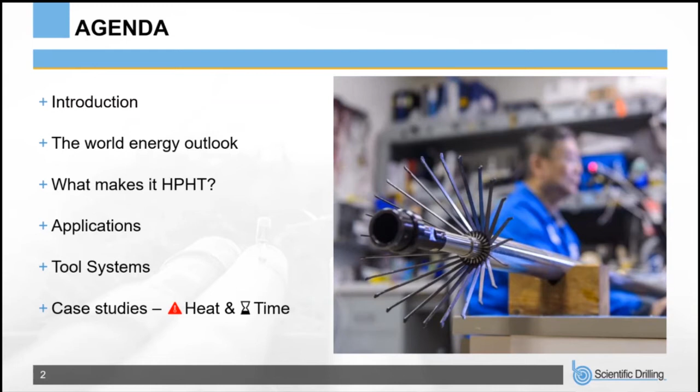Okay, so as for the agenda, we will touch on the importance of high pressure, high temperature hydrocarbons production with the recent growing trend of gas reserves exploration and production. Then we will discuss the tool systems that we are using to address those challenges. Later on, we will go through some case studies where we have overcome the challenges of heat and time. So we are pushing the limits of heat and time, as we will show you in the case studies.

So in this slide, I thought to give you a quick insight into the world energy outlook, as this links directly to the subject of this presentation, high pressure, high temperature challenges. The BP recent energy outlook published in 2019 shows that hydrocarbons will remain the major source of energy, with an observable increase in gas dependence as a primary source of cleaner energy.

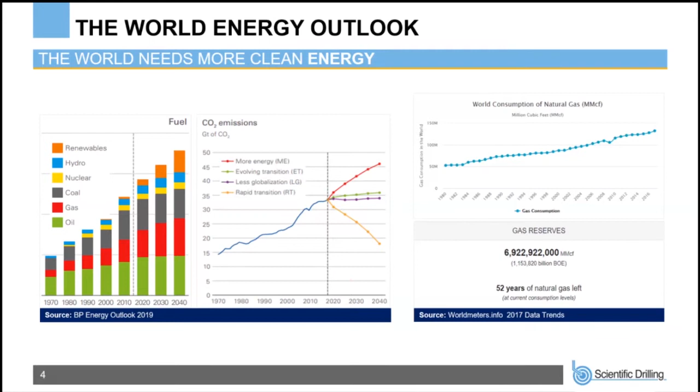The reason for this slide is that most gas wells are exhibiting a high pressure, high temperature downhole environment. So what makes a well classified as high pressure and high temperature? The term itself may be applied to wells that have only high pressure or only high temperature. Actually, few wells have both high pressure and high temperature.

An interesting oil and gas industry study back in 2012 estimated that around 100,000 wells were drilled back then, and only 1.5% of these wells could be classified as high pressure, high temperature. Yes, relatively small in number, but these wells often represent significant resources and require specialized equipment, proper training, and advanced planning to make it a successful intervention.

So a well may be high pressure. If we look at this chart here on the left, the well may be high pressure, most likely due to the pore pressure. The pore pressure means the pressure of the fluids within the pores of the formation rocks. Pore pressure increases with depth because the formation must support the overburden. Pore pressure versus depth can change rapidly due to geologic features in the formation and variable overburden forces, making the pressure in this interval high, and we can classify this well as high pressure.

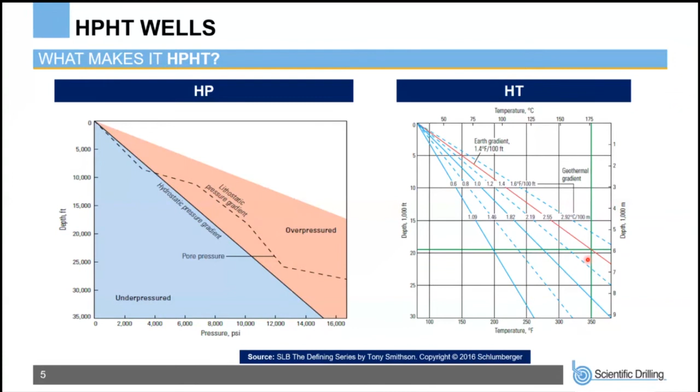Actually, it's not only related to the geothermal gradient; for thermal EOR, where we have steam injection, we have a high temperature downhole environment when we are applying steam injection as well.

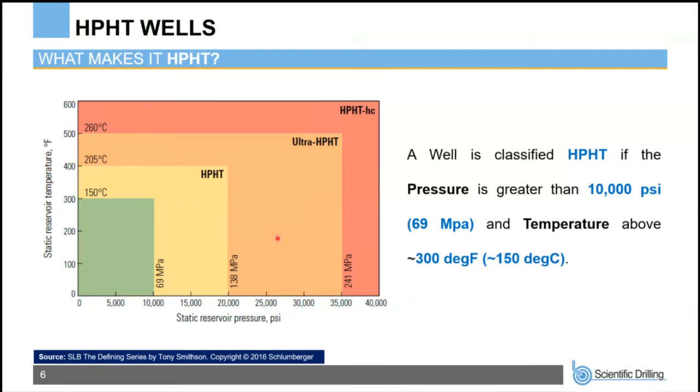So this graphic provides a classification of high pressure, high temperature by the reservoir temperature and pressure. So we can consider a well classified as high pressure, high temperature if the pressure is greater than 10,000 psi and the temperature is greater than 300 degrees F. So this shaded area is representing different well types: oil producer, gas producer, geothermal well, steam injector, ultra deep offshore well. So that differs from each well to another, depends on the type.

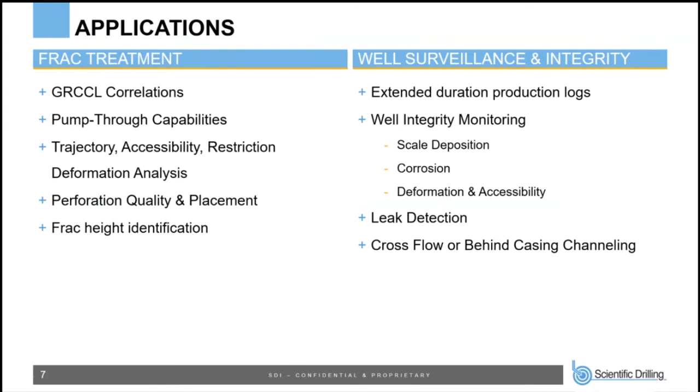I thought to group the list of the applications that are related to high pressure, high temperature, as you can see here. So we are seeing a growing demand for high pressure, high temperature technologies when it comes to unconventional and frac treatment development. Even for routine well surveillance for extended reach, for deep wells, there is also a growing demand for high pressure, high temperature production logging tools.

So my colleague Riza, product line manager, he will walk you through the Vulcan family system, which we are using to address the high pressure, high temperature challenges we are discussing. Riza.

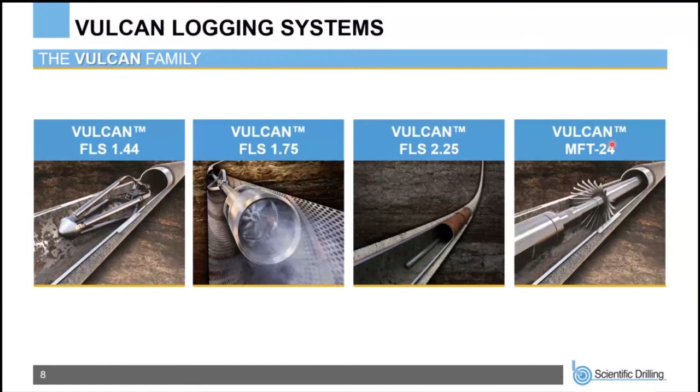So we'll be going through a number of very interesting case studies, and they're all based on applications where we've used tools from the Vulcan family of logging tools. So that's the Vulcan FLS 1.44, 1.75, 2.25, and the MFT 24 caliper. To give you a greater insight into the Vulcan family of logging tools, this is a breakdown of the systems.

So on the left, you have the production logging systems. The branch on the left is the memory system, which is the 1.44. On the right are the SRO and memory enabled systems, which are the Vulcan FLS 1.75 and 2.25. And the multi-finger calipers, they're all memory systems, and our oil field caliper is the Vulcan MFT 24, that's rated to 220 degrees C.

The base PLT system consisting of gamma ray, CCL, pressure, temperature and spinner, that's rated to 315 degrees C. The Vulcan FLS 1.44 and the 1.75, they can both have tuning fork density and capacitance integrated into the system, but only in memory mode. And again, that's rated to 220 degrees C.

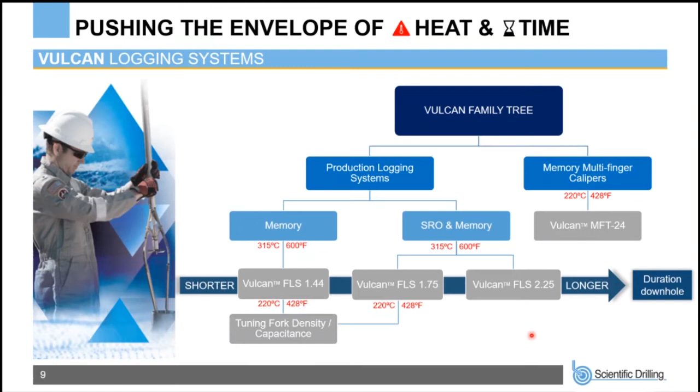So the figures against the 3 Vulcan FLS systems, they refer to the tool OD. And so the bigger the tool OD, the better the thermal insulation and the longer the potential downhole duration of the log. So the Vulcan FLS 2.25 offers the longest possible duration downhole. Okay, next slide, please.

Yeah, I thought I'd start off with a very special case study. It's a relatively recent log. The operator wanted to obtain a conventional PLT from its gas producing well, but the challenge was the temperature and the amount of information that they sought to acquire from the single run. So the temperature was 194 degrees C, 381 degrees F. They wanted to obtain a flow profile, cross flow.

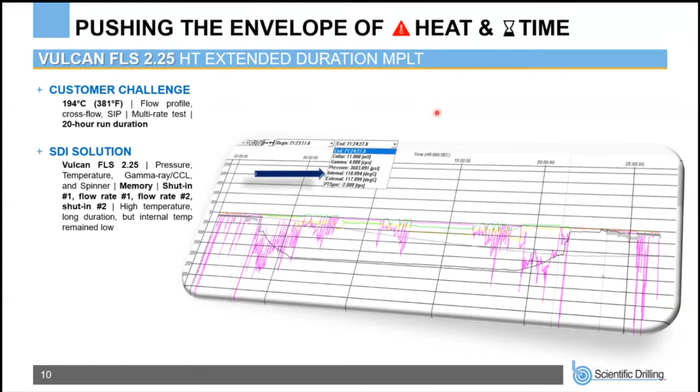They wanted to perform a multi-rate test for accurate SIP analysis, and that amounted to a run duration of 20 hours. And at a temperature of 194 degrees C, that was a big challenge indeed. But we were able to offer a fit-for-purpose solution to that challenge in the form of the Vulcan FLS 2.25. We were able to perform the log program as originally intended by the operator. So this consisted of shut-in passes, flowing passes at 2 different rates.

Critical to the success of such an operation is the maintenance of the internal tool temperature below the temperature rating of the battery, as well as the electronics. And on this run, the internal temperature remains comfortably below the limit of the battery and the electronics.

So the value that the customer gained from deploying the tool was that they were able to accomplish everything in a single run. That provided operational cost savings, and it eliminated an additional run, as well as minimizing production downtime. Okay. Yeah.

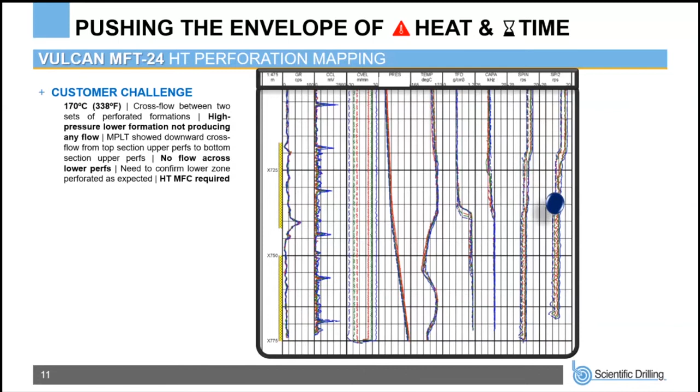So the next consideration was the status of the perforations, whether or not the liner was perforated as expected, and to help them with that objective, they wanted to run a multi-finger caliper, and at that temperature, our caliper was the only viable option. So as you can see in the video, both zones were in fact perforated as planned. Spiral phasing has been captured by the caliper.

So that provided another answer in their investigation of the productivity of the lower zone in particular, but it didn't provide them the answer as to why the zone wasn't as productive as hoped for. So subsequent to the logging that we performed and the data that we provided them, they were able to take further steps in stimulating the low zone, and they were in fact able to stimulate that zone and significantly add to the well's productivity and bring it online very economically.

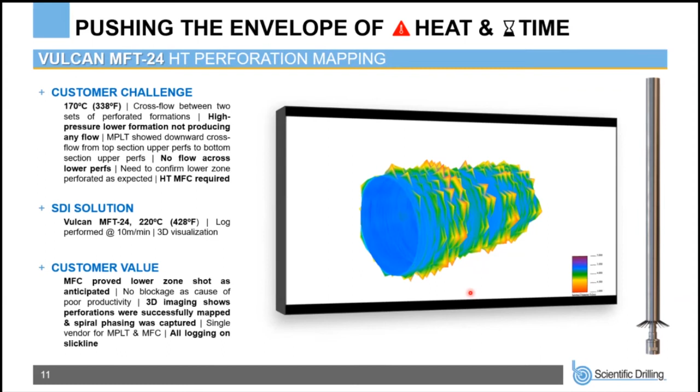So this is another case with different applications where we have used our high temperature multi-finger caliper as well. And this time it was for one of the steam injectors in the Middle East, and the whole field was applying thermal EOR applications and injecting steam in vertical steam wells 24 hours, 7 days a week, 365 days a year.

So it was challenging to perform routine well integrity surveillance for these steam injectors due to the high temperature downhole, and also the available technology to deploy a multi-finger caliper. So you can imagine that for every caliper, the operator is required to pump cold water to cool down the well to be able to deploy a low temperature multi-finger caliper. So Riza, if you can walk us through the case study as well.

Yeah, sure. So in this case, the operator didn't have the option of quenching the well to run a conventional multi-finger caliper. And again, for that reason, the only viable option was our multi-finger caliper rated to 220 degrees C. However, the bottom hole temperature remained uncertain prior to the log, and to mitigate the risk of the bottom hole temperature exceeding the rating of the caliper, what we decided to do was to run our Vulcan FLS 1.75 system in surface readout mode above the caliper in order to monitor the downhole temperature in real time.

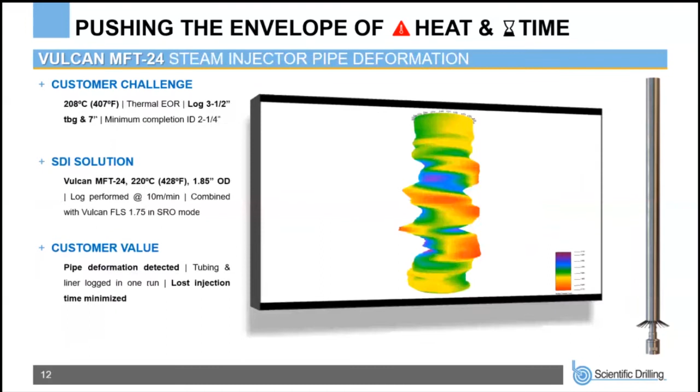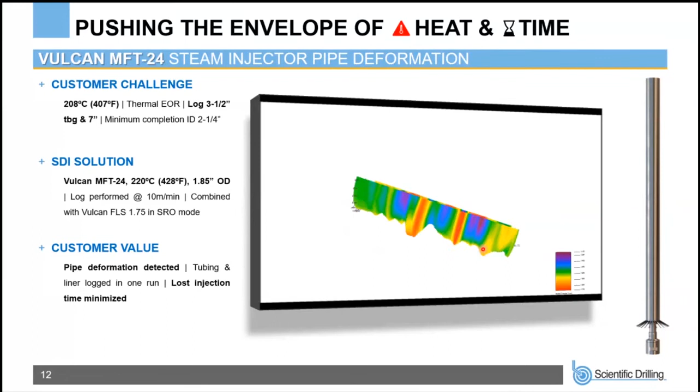So as you can see in the video, significant pipe deformation was detected. I guess you can classify it as classic helical buckling and an obvious result of long-term sustained steam injection.

Yeah. Okay. So this case study is also related to well integrity applications for gas producers or oil producers. We can see leak detection in oil wells or gas wells. Life is easier when the temperature downhole is standard. So we can use the available technology in the market, but it gets more difficult when we are required to identify a leak in a high pressure, high temperature well, because we are challenged by the lengthy procedures we would like to perform to pick the leak, and the bottom hole temperature as well.

So this case study is highlighting one of the leak detection cases that we have addressed using the 1.75. Yes, so at the time this log was performed, the operator didn't have access to a high temperature spectral noise logging tool, which would be run for such applications. But we were able to offer an alternative solution in the Vulcan FLS 1.75. So the sensors that were run included gamma CCL, pressure, temperature, and spinner.

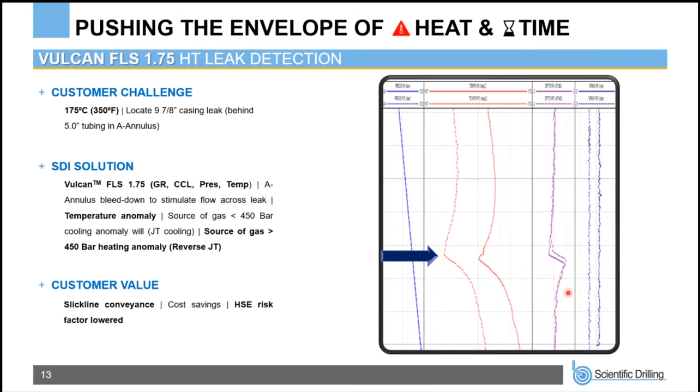So this was an offshore, high-profile North Sea well, but we were able to perform the logging on slickline, which brings cost savings and also improves the HSE risk factor quite considerably.

This is another case using the high temperature 1.75 system, but this one is more challenging because the logging procedure itself requires us to stay downhole for a longer duration, as we require to record 6 hours of build-up data, and this made the total run duration up to 20 hours. Downhole temperature is 186 degrees C, and there is an interesting finding that one of the perforation zones is contributing, the lower one is not. So Riza will also highlight what technology we have used in this case as well.

Yes, so again, the operator was looking for a conventional PLT to obtain information on the production performance and reservoir properties. They needed fluid ID sensors. So we deployed the Vulcan FLS 1.75 with TFT and capacitance. On the plot here, from left to right, we have spinner, temperature, pressure, tuning fork density, and capacitance. So where indicated, we see clear evidence of fluid entries, both in the response of the TFT and the capacitance.

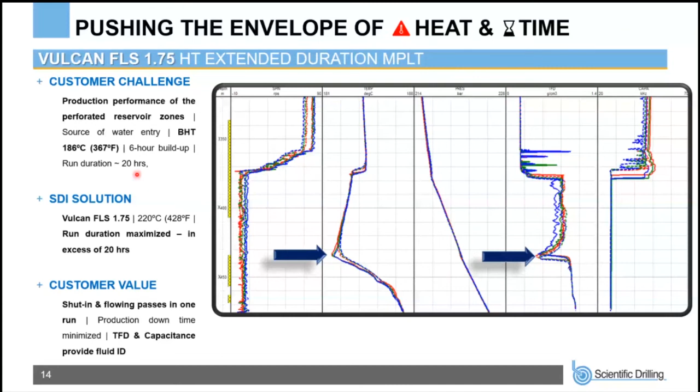So again, a very challenging application. 20 hours, 186 degrees C, when you're running fluid ID sensors as well, is a big hurdle. But our system is tried and tested, and we were confident that we would be able to meet the objectives.

Yeah. Okay, next slide, please.

Yeah, so this is the last case study, and it's even more challenging because of the critical application here. So this is a 200 degrees C well with a depth of 6,000 meters. We are using coiled tubing to log this well, given the slow speed of the coiled tubing. The application is setting a plug for a further perforation operation. So the challenge here is much bigger: slow logging speed, deep well, ultra high temperature environment. So we have used a special 2.25 system, as Riza will highlight and comment.

Yeah, this was a first of its kind job for us, and we weren't aware of any other instances of a tool being run on coiled tubing at such a temperature and down to such a depth. So we felt that we needed to prove the tool, qualify the tool ahead of the job, and to do that, we conducted an oven test, and we did that in real time mode. So the run duration was predicted to be approximately 16 hours, so we set the duration of the test accordingly. The oven was set at 232 degrees C, so higher than the expected downhole temperature, but it would give us confidence in the ability of the tool to withstand the actual temperature.

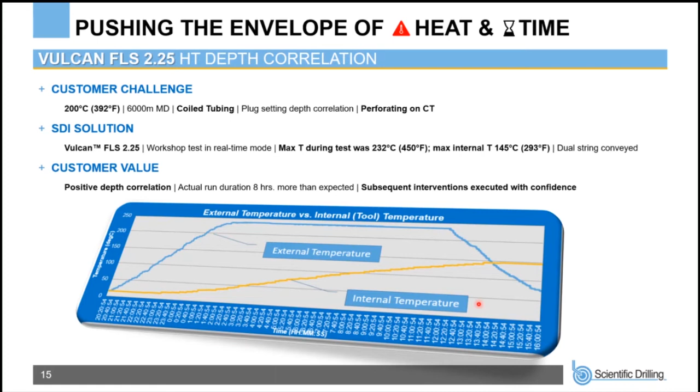The logging was conducted as planned, and good quality data was retrieved, with a positive depth correlation. The actual run duration ended up being a good 8 hours more than expected, so somewhere in the region of 24 hours. But despite that, the tool performed well, and the internal temperature remained below the rating of the battery as well as the electronics. So with the information we provided, the operator was able to carry out subsequent remedial interventions with a lot of confidence.